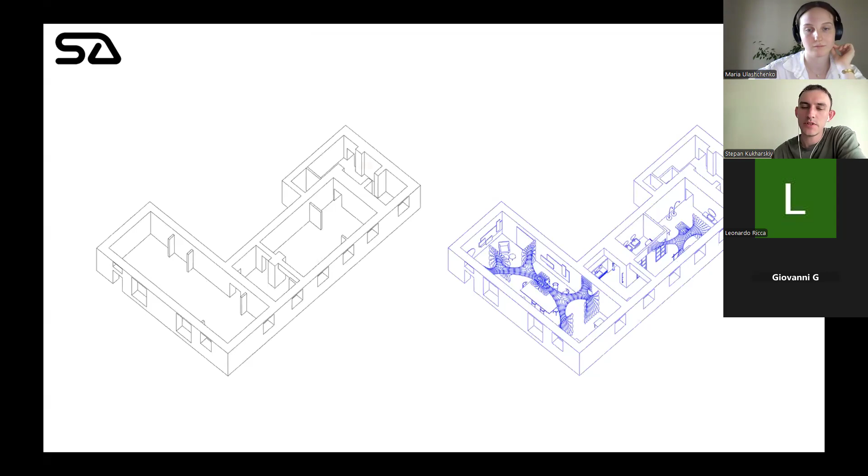Like this one, it's an interior for an interior design showroom. We created the whole interior with this parametric structure. This is the axis of the space, and you can see two parametric structures like this.

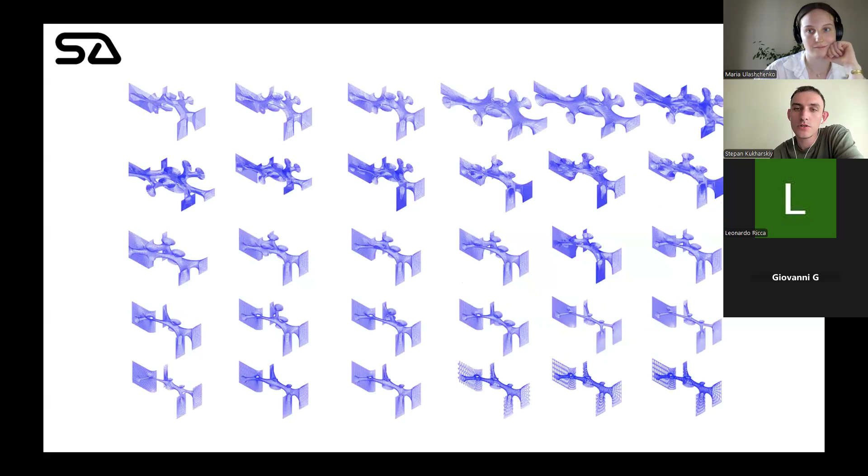We use Grasshopper and Rhino a lot, experimented with form finding, then tried to make everything simpler for it to be really buildable within the time limits and budget constraints we had working on this project.

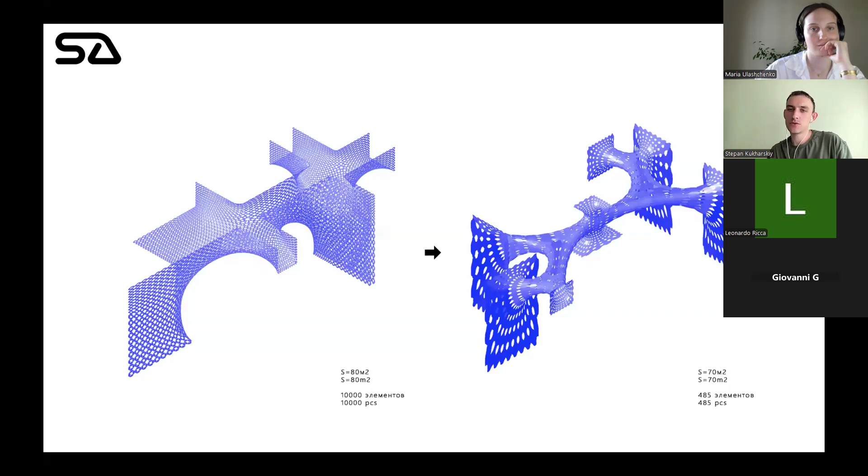So here you see how we went from a form approved by the client, but it initially had like 10,000 elements, so it was really hard to assemble. We reworked it into 485 elements, which is way less and way simpler to create and build.

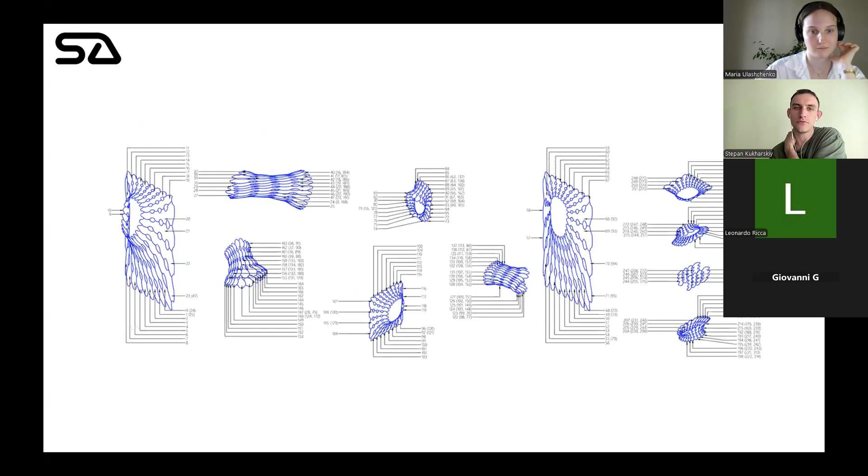It's all laser cut from flat aluminum sheets, and when you assemble those parts, they combine into 3D modules, and those modules combine together to assemble geometries like this.

We worked with two companies. One company produced 3D prints of different objects from recycled plastic, and another company provided us with hydroponics and plants.

So with students, we developed algorithms and geometries to be 3D printed and assembled together, thinking about how we can bring vertical farming into our cities, both in interior and exterior spaces, to grow herbs and food, something edible within our cities, not outside, but as close to the citizens and final users as possible.

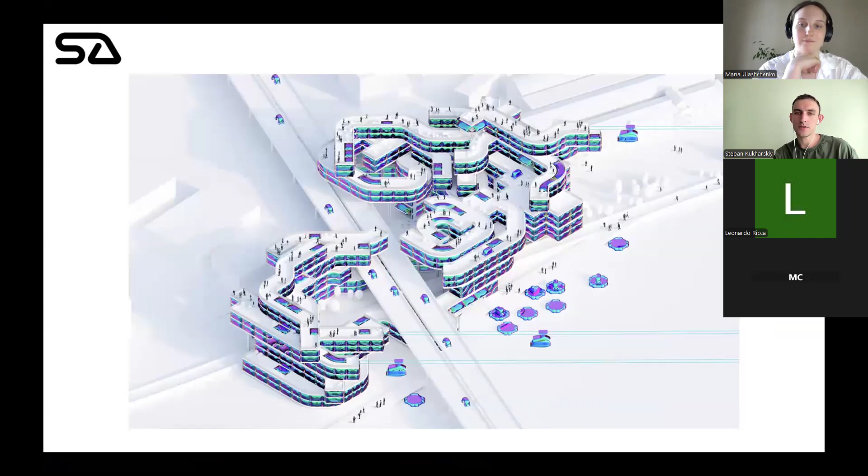So this project is a project for a competition we won, I would say maybe a year and a half ago, specifically for using AI.

It was before MidJourney and before ChatGPT, and we used a tool called Dream, and we started generating some phrases describing this future city.

How do we want to see it? What kind of features will it have? Then those features we just put into a prompt and generated some images, and that's how we got these mood boards.

And from these mood boards, this project was made for a company from China. They create autonomous vehicles, and they needed some transformable spaces for their autonomous vehicles, inside those vehicles.

So what they do is a four-wheel structure for the vehicle, and on top of that they can place different functions. It may be a hotel room, for example, or an office or shop, anything.

So basically they were experimenting with a constantly transforming and moving city without static buildings, where most of the spaces are created by their vehicles having different functions and being in constant movement.

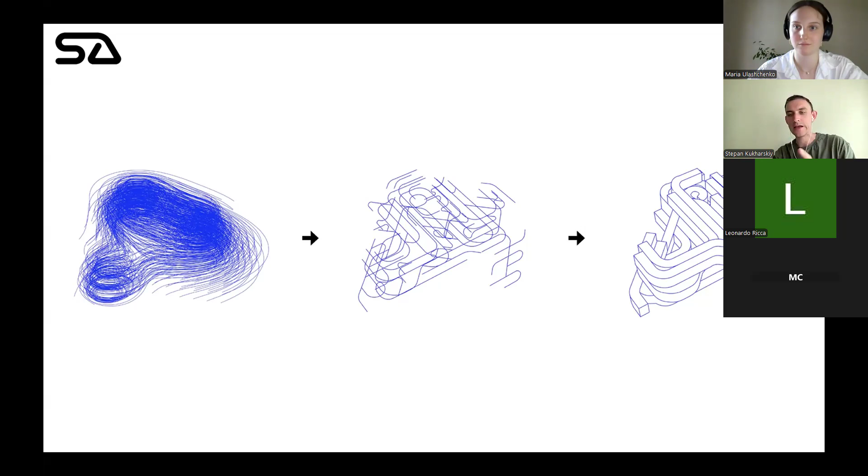So we kind of grasped the infinite movement of the vehicles, tried to make it more modular, for it to be buildable and constructible, and experimented with different compositions.

So you can grow this structure or decrease this structure by adding modules or removing modules.

I experimented with economics for this project. We took a market in Lagos as a test site, and we decided that we will keep the market.

Certainly, but we will add some more functions to it, like cafes, magazines, startups for recycling the products from the market and producing something new, like packaging, for example, for those products from the market and stuff like that.

And so we ended up with images like this. Modules, wooden structures with inflatable walls from ETFE that could transform, letting the vehicles in and out.

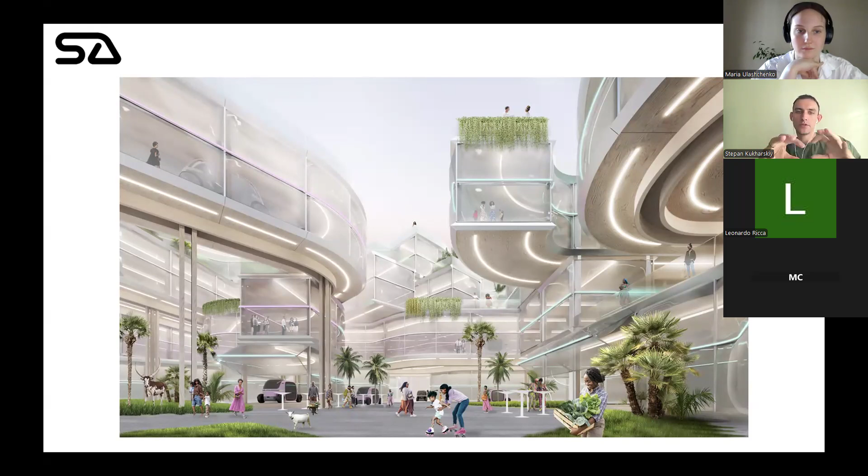It's a city neighborhood that is in constant movement, where there are no rigid separations for transport and for people. They all mix together, combined in a continuous space, something like that.

It's working. So we experimented a lot with the concept, working with AI together on the concept, trying to find the logic and the story that we want to present with the architecture of the exhibition space, and later on, of course, with images and 3Ds and so on.

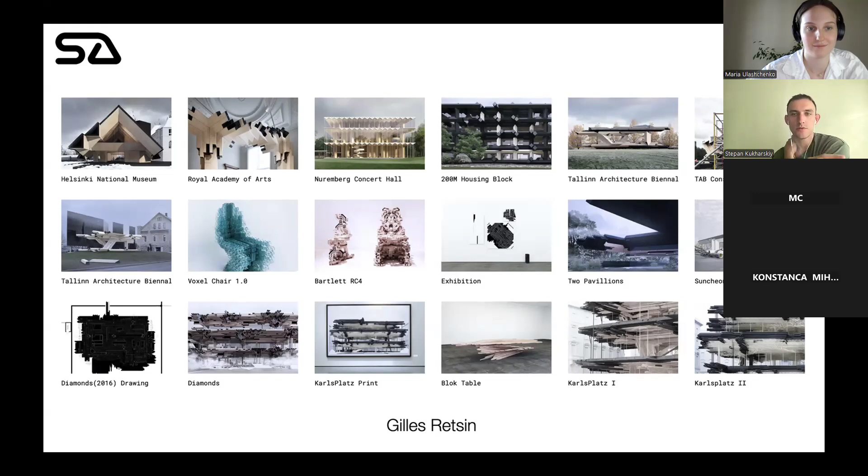This guy, his name is Gilles Retsin. He is experimenting with a discrete approach in architecture - combining different pieces, modular architecture, stuff like that. He founded his own company called AUAR, which is mobile factories building homes. What they do is ship a robotic arm in a container that assembles different parts for buildings on site. They create buildings like this, and work together with different developers across Europe and the United States.

The Very Many by Marc Fornes produce sculptural objects. They do not create their own software, but of course they use their own in-house algorithms developed with Grasshopper, Python, and I guess different other technologies as well.

When you work with software as an architect, you have something in your head, but to implement this you've got to master the software. And if you do not know your software good enough, you cannot create the ideas that are in your head - so you're getting blocked by your software skills.

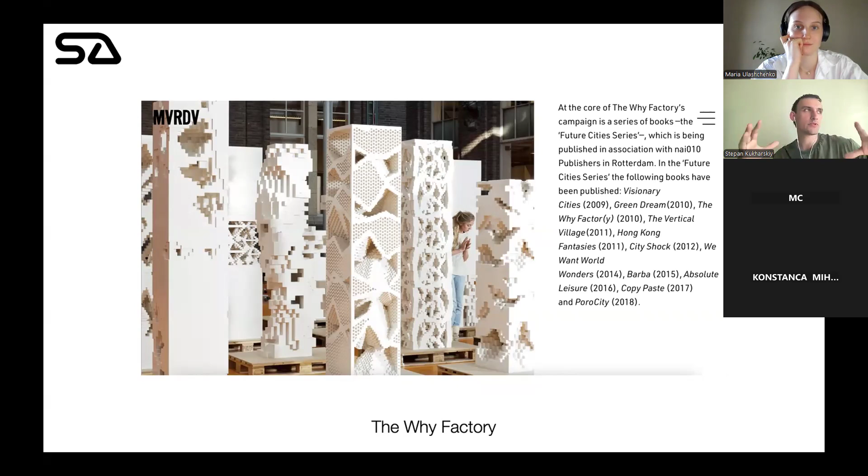The question here is, who is controlling your project then? Is it you, or is it your software skills? A lot of different architectural companies and studios across the globe invest in experimenting with technologies. For example, MVRDV has the Why Factory, a separate group of architects experimenting with technologies, creating experimental projects for exhibitions, stuff like that.

When we talk about software, there are different concepts nowadays. One of them is Software 2.0, introduced by Andrej Karpathy, and recently he introduced a concept called Software 3.0. Andrej Karpathy worked at companies like Tesla, on Autopilot for example, and then at OpenAI on models like GPT-4. Now he's working on his own company, mixing AI and education.

The idea behind different types of software is that Software 1.0 is executing a program line by line, with a predetermined outcome - you write your program once, it outputs some results, and it works always the same way. Software 2.0 is based on neural networks - instead of writing a program that outputs something, you train a neural network on a dataset to output something, and that's Software 2.0.

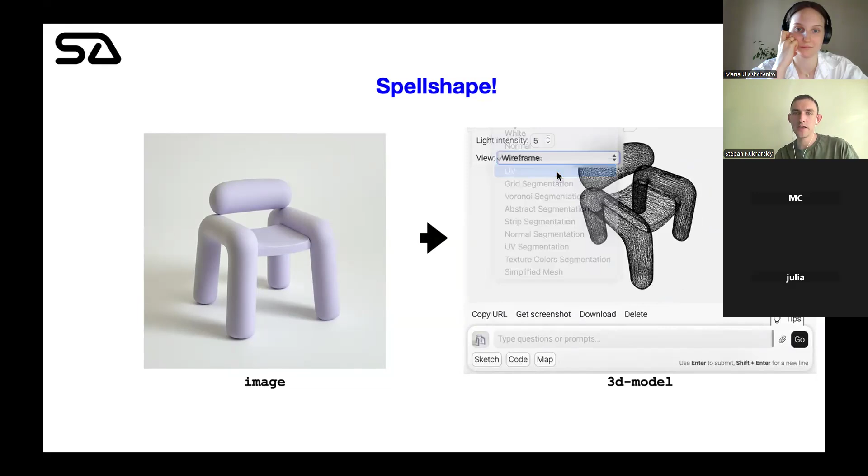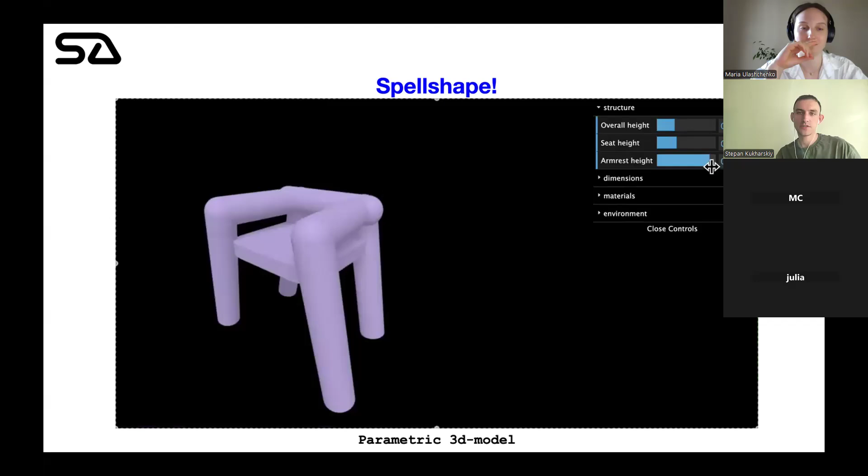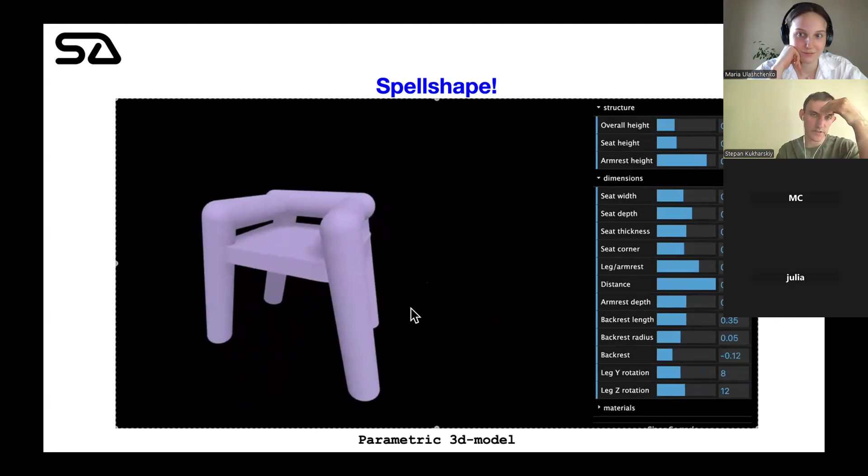So you can start with some simple description like a chair, for example, and we will produce you a chair model that you can set up the way you want it to be. The geometry, the quality of geometry here, is controlled. So it's basically working like text-to-code, then visualized with a 3D thing. It's a different approach compared to image-to-3D that is being developed right now. We call this tool Spellshape.

It's not available yet. We experiment with different things like parking structures. For example, you can get a parametric model for a parking structure with just a single prompt, and you can then fine-tune the number of floors, the parametric facade, for example, if you want to, the columns, everything you need for a simple project like a parking structure.

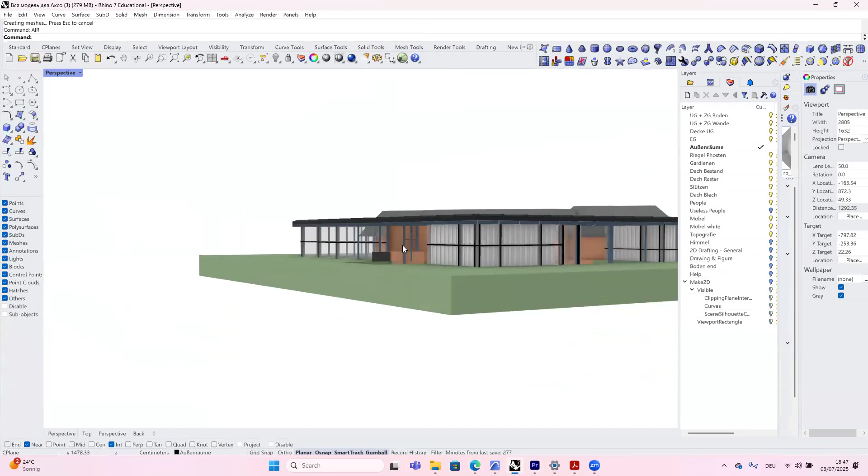Let me move this over here. So what we have here is a 3D model that I did with my partner one of the last semesters, and it's just a house. Nothing special about it, just a 3D model. And what we're going to do now is showcase SUAPP for you.

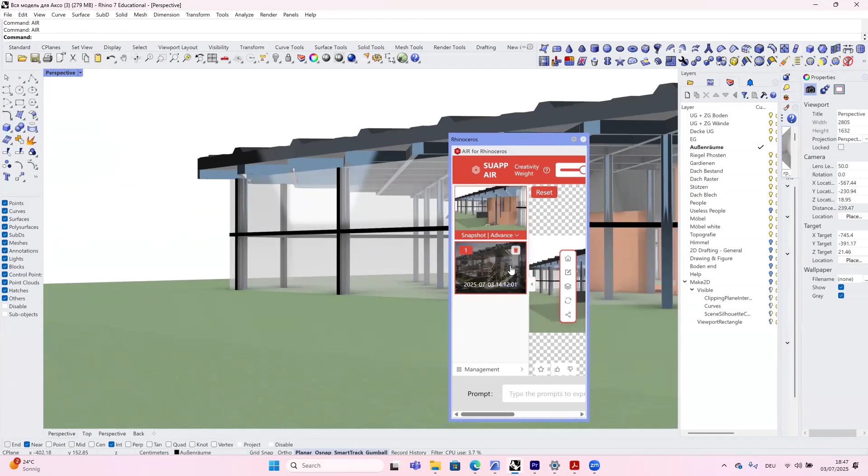So what you would do is go up here, type AIR as a command, click, and boom, this window opens. Sorry, I want to make it bigger for you. Do you guys see this window? If you can't see it, type it in the chat. But what we do now is reset it.

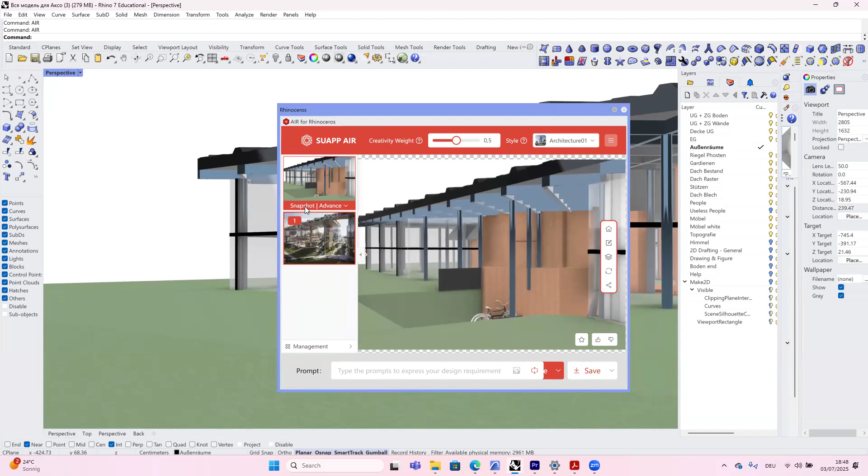So right now it has the snapshot of my 3D model. This is what we were looking at before. I'm going to do the snapshot again. New snapshot, do you see here? Now we have the place here to do the prompt.

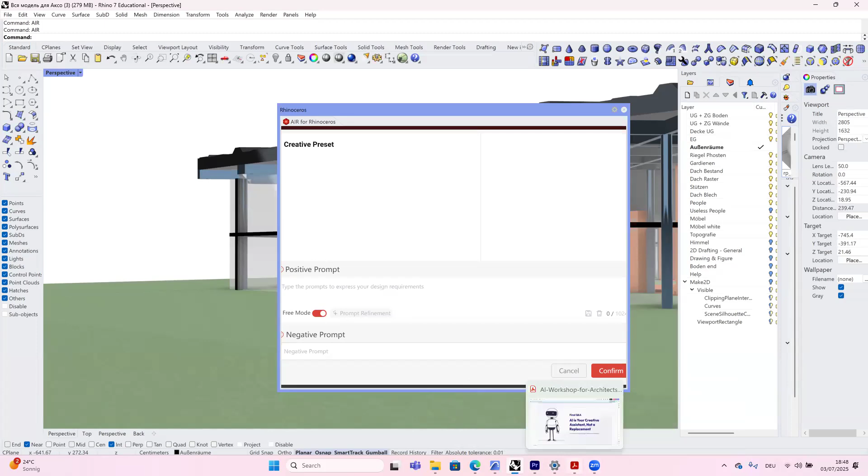So you can type in a positive prompt or a negative prompt. I already prepared some positive prompts, so that's what I'm going to do. But if you want to learn more about prompting and how to prompt effectively, you can watch the recording of the last workshop, which is in the Telegram channel. Let me do organic pavilion, timber facades. Let me make this big because I want to save it.

Here we go, I'm going to just take one of my prompts. We go back to SUAPP. Oh, I don't know what happened. Let me do it again. Sometimes when I switch around too much, it stops working.

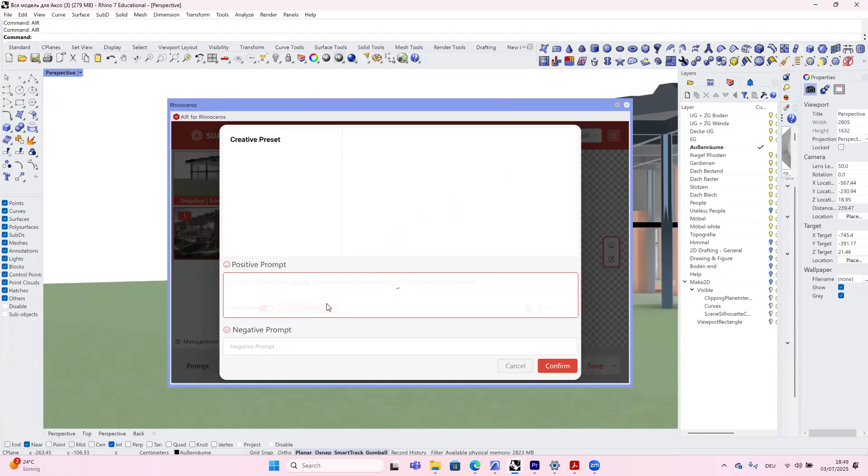Okay, perfect, so I'm going to insert the prompt: organic pavilion, timber facade, parametric form, dramatic soft light, hyperrealistic render. So this is what I did. You can also activate prompt refinement, which is a tool provided by SUAPP itself that makes your prompt better. Look what it did now, it basically improved my prompt for me, added more details, hyperrealistic, every detail. So whatever you need, it refined it.

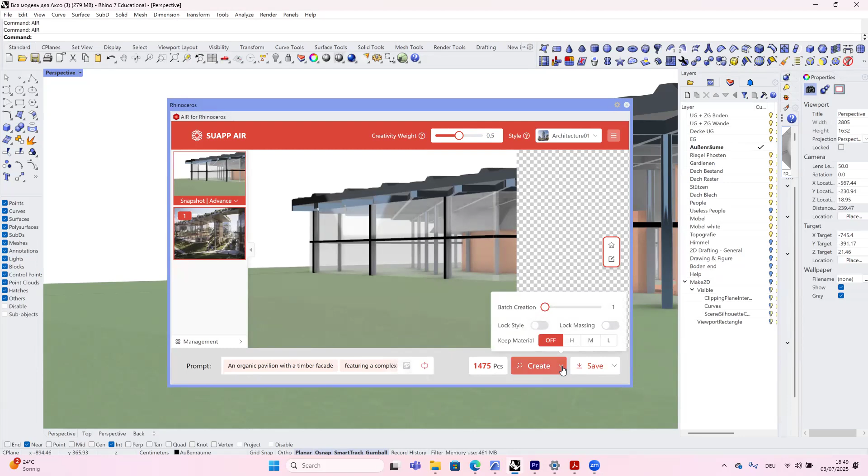Confirm. So now here, this is creative editing, I'm going to talk about that later. But what we're going to do now is click create, and it's going to create a rendering in seconds. This is insane, guys. When I first tried this, I was shocked to my core because I've never seen anything rendered so fast. It takes like 20 seconds, maybe even faster.

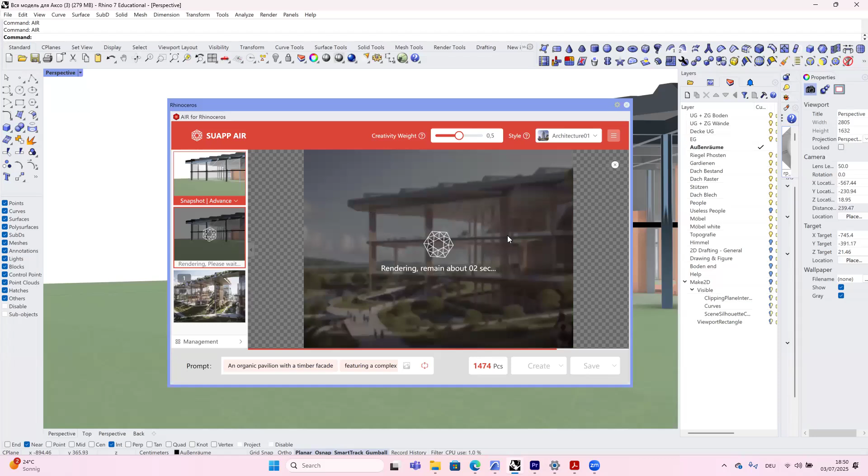But it basically creates a whole render based on your description. Come on, 3D model, render. You guys, like seconds from this to this, and it looks good, even when you zoom in. Obviously you go back in with Photoshop and delete whatever you need, but this looks incredible.

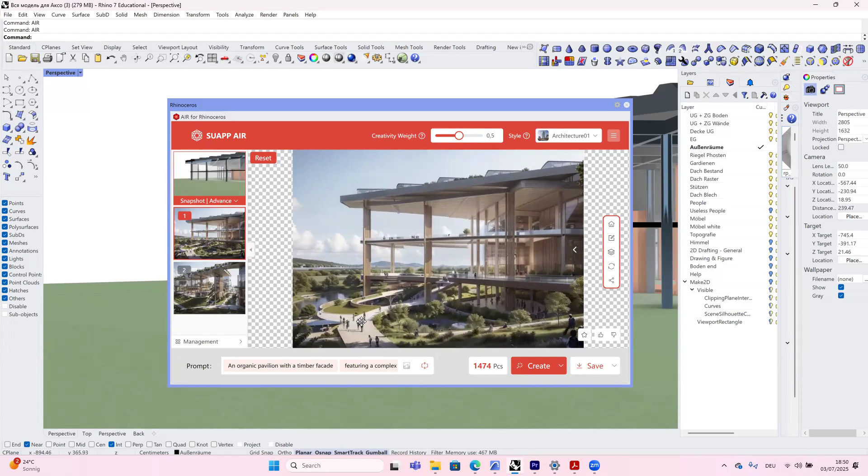Okay, so for example, if you're like, oh, but I don't like what's happening at the bottom here, we go to editing mode. That's what I meant, I was like creative editing, what am I talking about? But what we do is brush selection, we go like this, so we highlight everything we don't like, basically. I don't like this whole part, I want this all to be different. So I go over here.

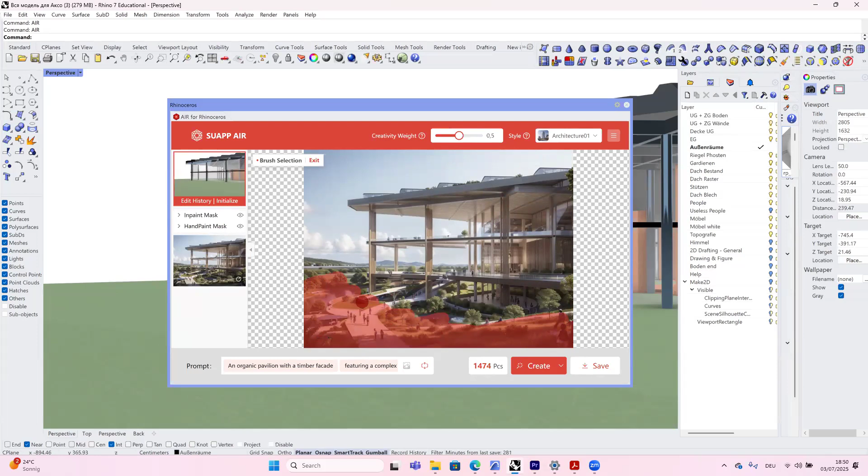And I want... and now it's going to create something different from what we had before, basically. Oh no, where did it go? Hold on, I lost it. Oh no, it's here.

How can I set the scale of the building to match with the rendering? It seems like the AI turned a one-story building into a huge building. So this building is actually, in your case it may be different, but in my case this building is actually pretty big, so it is correct. But if you're having trouble with the AI scaling, you can just zoom in and pick a more human perspective.

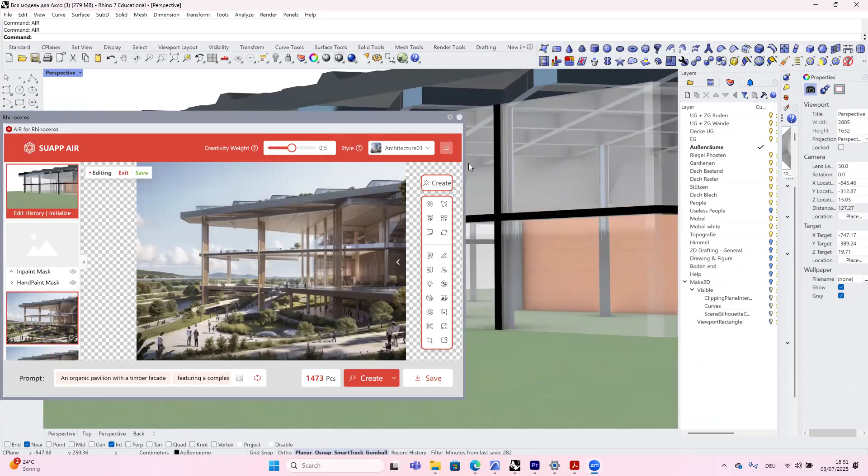When you pick a human perspective, the AI is able to read the scale better. I also know that you're able to set the scale somewhere here. Let me see, lock massing.

If you try lock massing, you can mask different parts of the section of the model, and it allows for a better result. So where's my new thing? Oh yeah, here. Did I just lose it? Oh yeah, look, so this is what I highlighted. I wanted this to change, and now it created this. So amazing, right? Let's try a different prompt.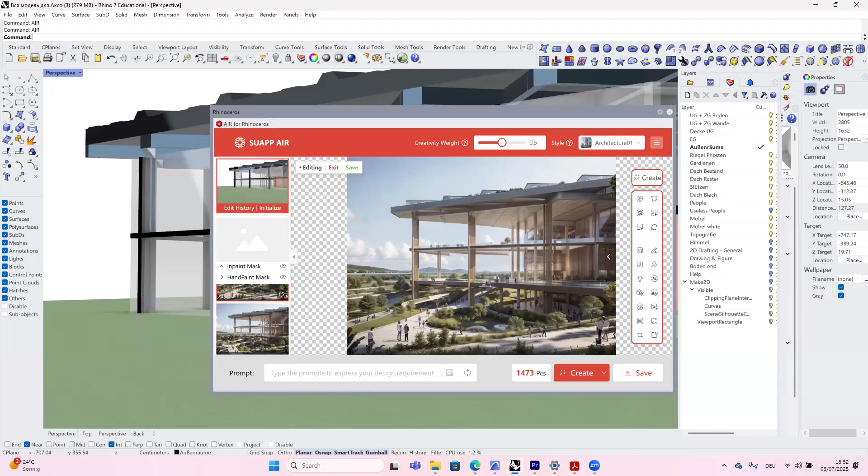I have more prompts. Let's say brutalism, everyone likes brutalism, right? So let me go back in. We're going back into SUAPP, we're typing in our prompt. Oh no, it didn't take it. Sorry guys, I'm going back in. We're going back into the Rhino, going back in here, we're going to do some prompt refinement.

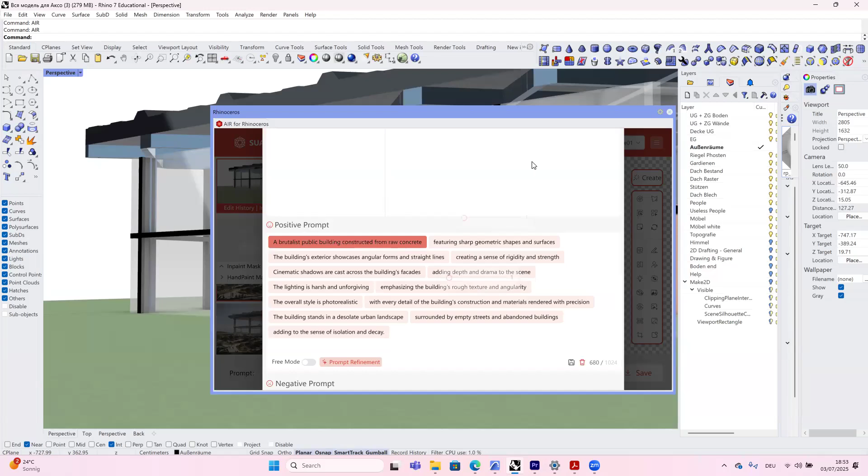The AI does it for yourself, so it refines the prompt for itself to understand the prompt better, which is super cool. Also, if you click on different sections of the prompt, you can highlight how important it is for your render. So if you go here, like 'Brutalist building raw concrete,' you can give it a 4, and then it will treat this part of the prompt as the most essential, basically.

Okay, so here we go. Okay, hold on, let me confirm.

Does SUAPP work with Archicad or just Rhino and SketchUp? I believe it may also work with Archicad. I've only tried it with Rhino or SketchUp, but if you're having issues using it with Archicad, you can convert your Archicad model to a 3DM, which is the Rhino file, and use it in Rhino as well.

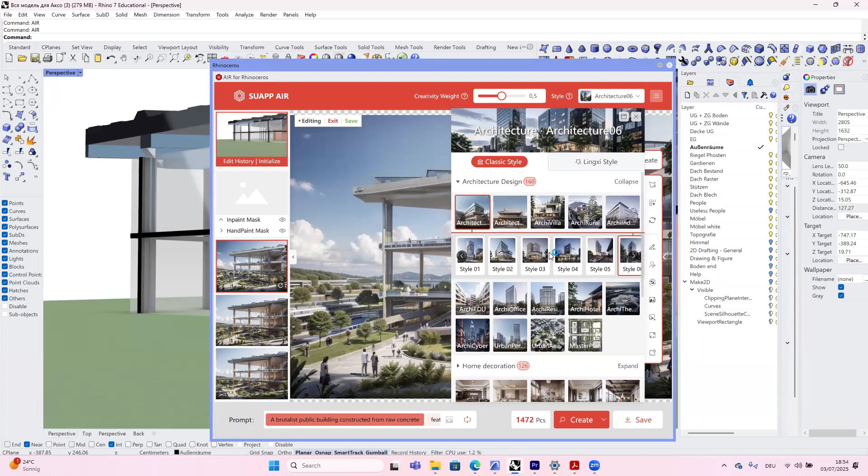So look what we have here now. It's interpreted our prompt, so we went from the wood building to a concrete building. You can also go up here and pick different styles that SUAPP has chosen for yourself. So maybe you like this style or this type of building. Let's try something new, and then you just click create again, and you can experiment.

Obviously this is not like perfect rendering up front. You can't control it perfectly, but it is incredible for testing out quick renders to see how your image goes.

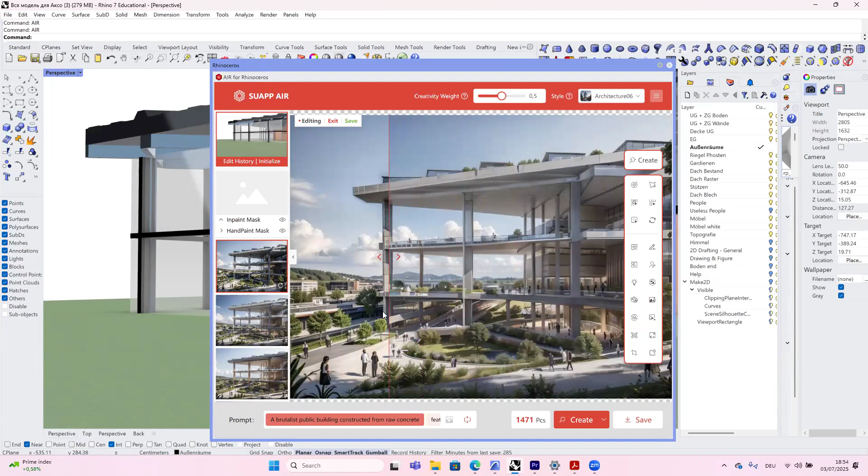Okay, see, now the rendering has a little bit of a different style, and it has maybe more of what we were going for. The raw concrete building, it's very cool. I just want you to see what changed, so if I go left, right, left, right. Pretty cool, huh? Yeah, I think this is definitely very cool.

I'm going to save this into our workshop file. Save, for us to use later in MidJourney.

Also up here, you can find the creativity weight. The creativity weight basically allows the AI to see how much creativity it has. Let's just set it to 0 and see what happens. I'm just playing around now to show you guys how it works. But very cool.

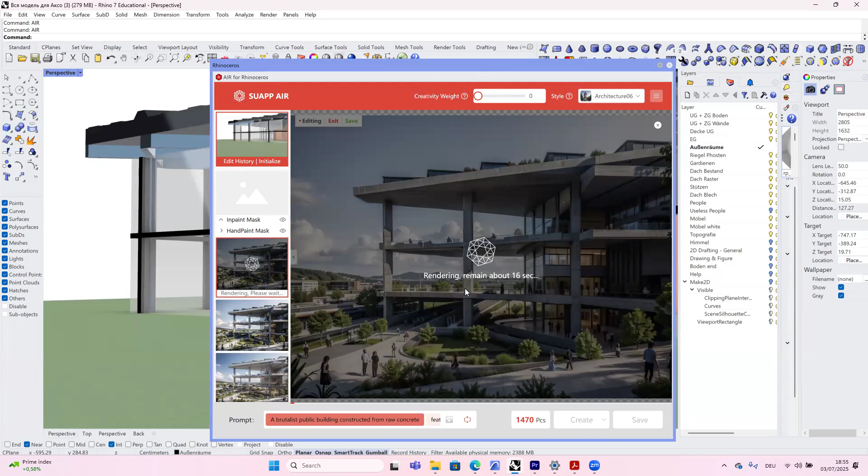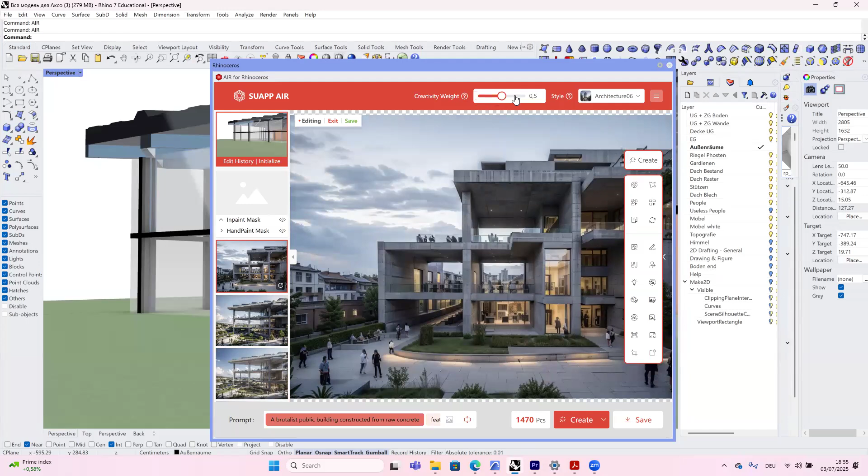Okay, now it is changing our shape, so we have to maintain the creativity weight. Let's see what happens if we get the creativity weight to 1. What will happen with our model? So it's still using my basic image, just a screenshot of my 3D model, and it does all this. I think that's incredible.

Now some changes were made, but because our creativity weight is set to 1, it's not that big. So this is how you use SUAPP AI. SUAPP Air is the command, SUAPP AI is the full name.

Before we move on to MidJourney, I want to go through the editing. So obviously you can do the brush selection where you can remove stuff, the lasso selection, precise selection - these are just selection tools to fix things. You can also do inpainting, so you can implant specific objects from Google and put them into your render. You can sketch and add stuff, collage, background remover, style reference, a lot of options, guys.

Let's say I want to sketch. Let's say we're going to add a roof here. Okay, this is a really bad drawing.

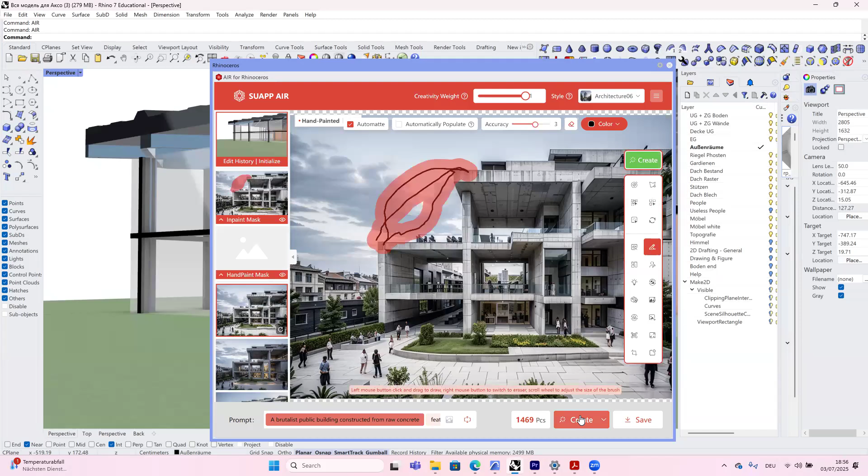Obviously this is a really bad drawing, but you're gonna see what it does. I think the program takes a little bit longer because the AI has to think about what my messy drawing means, but I still think it's very useful.

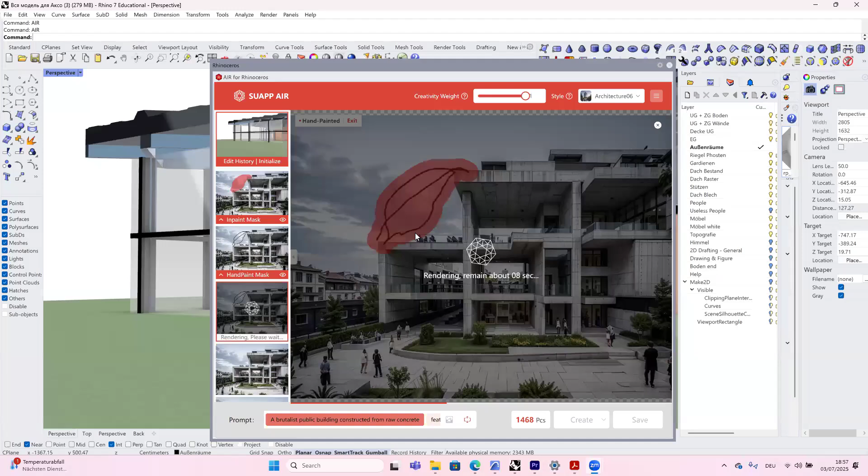I use SUAPP AI for just testing out how my 3D model looks and how it comes off on a render, because sometimes you don't have enough time to render fully just to try it out. I use it as a shortcut to quickly see what happens to my render.

See, okay, it interpreted that as glasses coming from the roof, but that's pretty cool. Imagine if you actually took your time and drew a full roof here, it would just integrate that. So that's super cool, guys.

So this is SUAPP. I would like to go back here. Sorry guys, no more editing mode. Okay, here we go.

Full screen mode. So this is where we were now. So we saw how to use SUAPP AI, this is what I showed you just now, we had the demo. So let's talk MidJourney.

MidJourney is another AI tool that allows you to create AI visual storytelling. It's best to generate images for architects, but also a lot of game designers and creative professionals use it. You can also do animations now with MidJourney version 7, which is super cool. Obviously you also need a subscription for it. I just got the student subscription, which is $11 per month, but I think it's very worth it.

So what is it best for? In my opinion, it's best for mood boards and atmospheres. You can create really cool reference images, material and facade studies, competition visuals, and early project presentations, which I think is super cool.

So why do architects use MidJourney? They use it to explore style and materials because you can create reference images. It's also ideal for competitions or client pitches because you can create compelling visuals very quickly for presentations. And you have creative freedom because it's AI powered, so you can quickly try out different tools very fast, back to back, which is very cool.

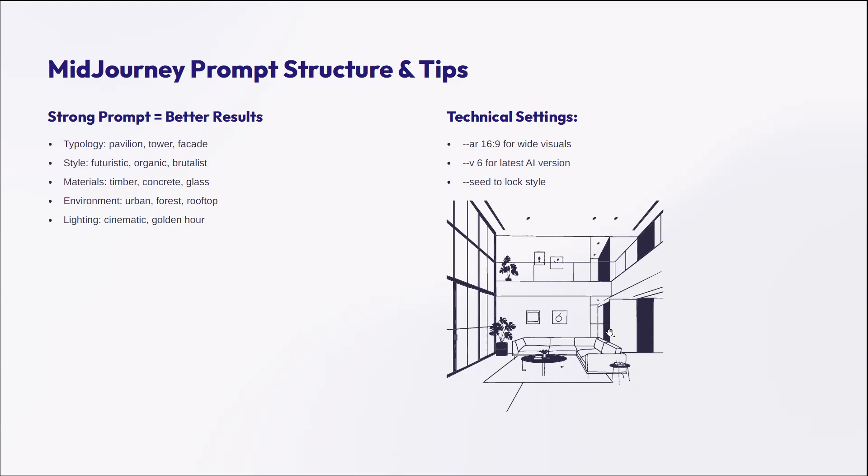So I think those are the most important tips, and also some advanced tips I added recently: you can test multiple prompt variations, and use opposite keywords sometimes to get new results. A friend of mine told me to try this, and it actually works pretty well.

I will show you now. You can refine prompts with each iteration, and you can upscale the best images. But also, warnings: the AI can sometimes generate unrealistic forms, and you definitely need to validate your concepts before modeling. It's just for inspiration. Obviously, you can't really use it for construction documents or anything of that sort yet.

So now I'm going to do the demo for you. Let's go. Here we go.

Okay, so here we are in MidJourney. I just typed in MidJourney and logged in with my account. Basically, what was also on my story is I just took one of my prompts, which is organic pavilion, timber, isometric form, sunset setting. As you can see, I have the typology, the form, the setting, the light, and the render.

And this is what we got. So this is already V7, it just created some images. Obviously there was no reference image input by me, it was just the software itself creating these images. But I think it's very cool what it can create with just a couple of words.

You have some creation actions over here. Sorry, maybe I should have mentioned this before, but to create something in MidJourney, you go on the Create tab and type in your prompt. Once you get your images, you have some actions here, like create strong or subtle. If you pick an image and do strong, it will create multiple images of that image. You can also rerun the same image, or animate it with high motion or low motion. I'm going to show you that now, but I think this is incredibly interesting for trying out.

And then what I did is I used the same prompt and said, okay, animate this for me. And this is what it made. So just from nothing, we created an animation of a pavilion. Amazing, right? This is what happened, this is what was on my story.

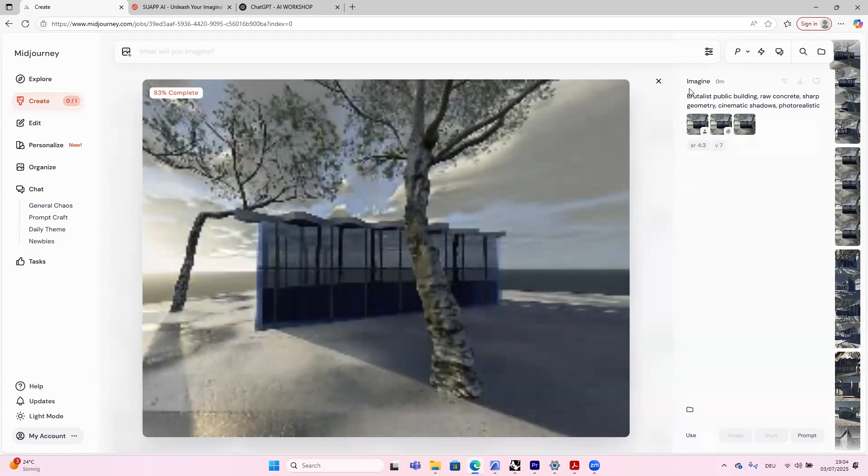Okay, look, it already looks like my model. The image I put in, if you were in the last workshop, you know this is exactly like my model. It has the same vibe, this is basically my model image. Let's see, it's still not done, so I'm going to wait until I am excited.

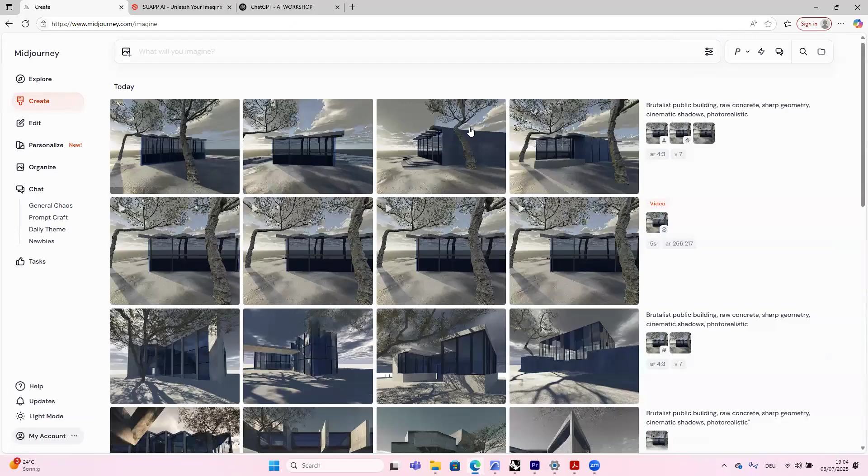But here are some animations. What I would use MidJourney for, if you're an architect, is you can input your 3D model screenshot and it creates a full cool animation. We can also try a new one if you want. But look, now it created different views of my model. I think that's amazing. Let's try it again.

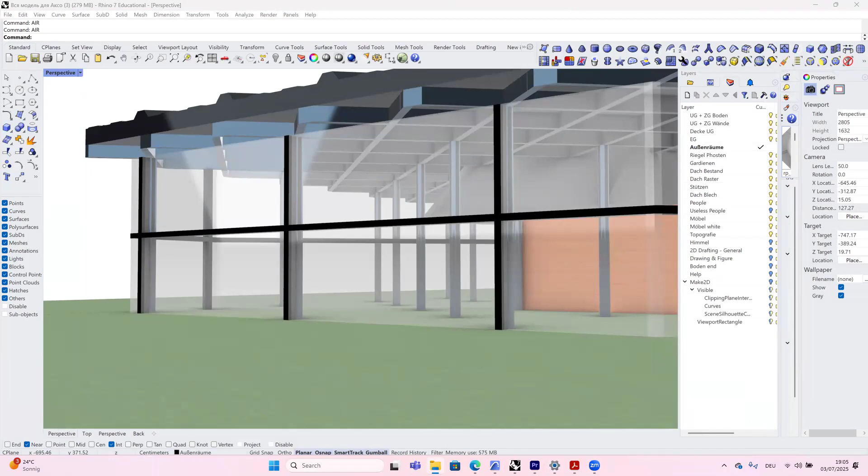So let's take my image, I'm just going to create a screenshot. So I just made a screenshot. Where's my screenshot? Did I just lose my screenshot? I hope not. But actually it doesn't matter. Okay, I don't know where my screenshot went, but we can just go here.

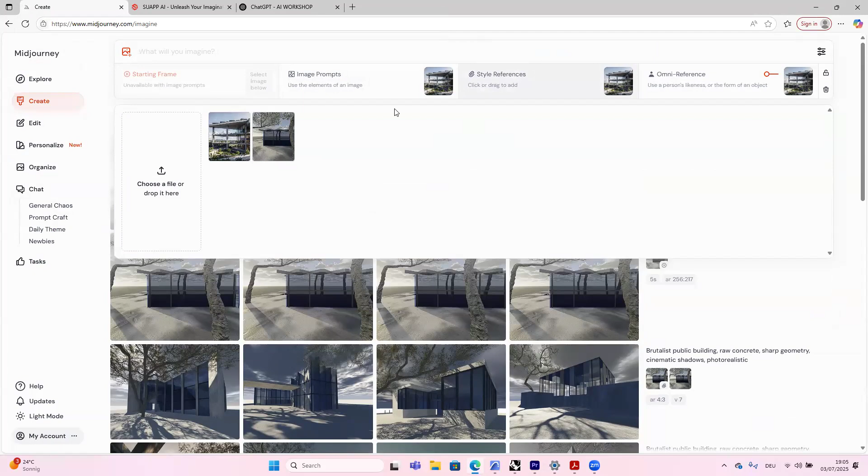Let's add another image, let's add my SUAPP image. Open. So we're just going to use my SUAPP image. We're going to use it as an omni reference, okay, so we put it everywhere. And I'm going to use my same prompt that I used last time.

So this prompt, and let's see what MidJourney creates. So I'm using V7 and not changing anything for now, we're just testing it out.

Let's see. But I actually didn't know you could use images before, because MidJourney used to be on Discord in the early days, and I don't remember you being able to input images like that. I think that's pretty sick, in my opinion. Let's see what it does. So obviously we gave it a prompt, but also our image, so it's going to use both to create the visualization.

Let's see. 71%. Cool.

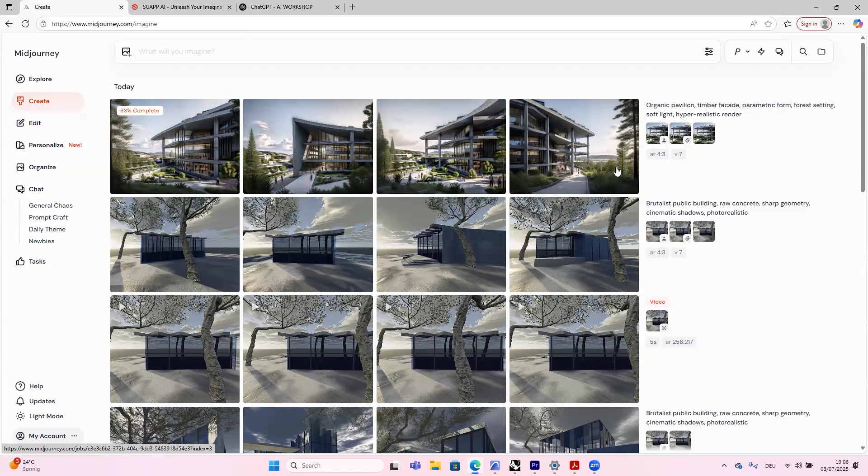So obviously you see the image is not exactly like a 3D model. You can play around with some settings, reduce the creativity of the actual AI, and tweak around to get as close to your original 3D model as you can. But obviously it's not going to be perfect. This is AI, I don't think there's a perfect AI yet, but it's cool for experimenting.

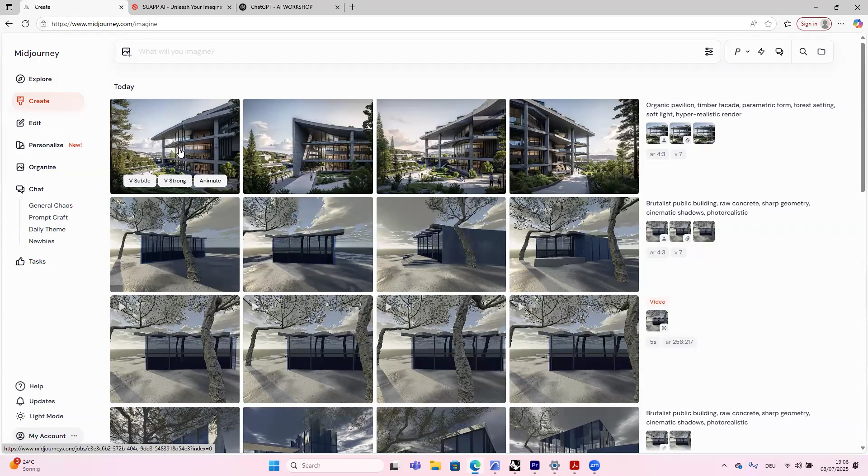So this is what we got now. It just took our image and basically made it more refined. I think it changed the roof shape actually, but let's keep it as is. Let's say, oh, I like this one. Let's say strong, we like this, and let's animate it in high motion.

So now we're going to wait for the video. Down here it's creating the variations, and up here it's creating the video. I'm curious to see what either one will be like.

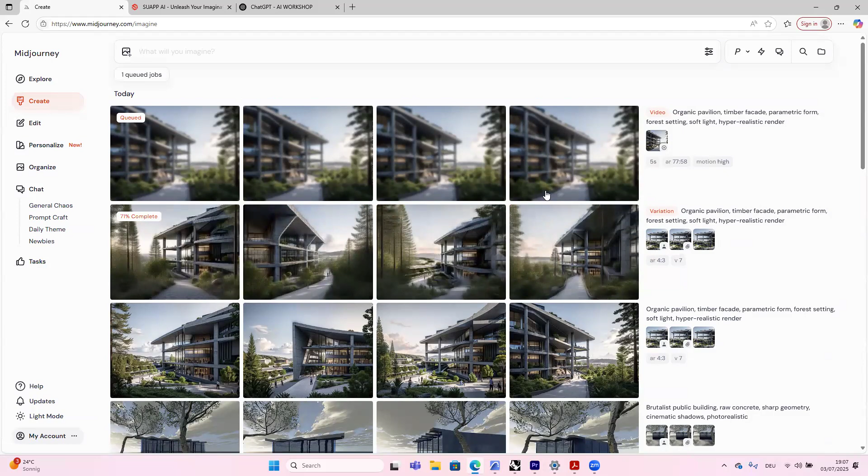So now down here, it's creating some variations of the image I said I liked.

Okay, cool, this looks cool. Obviously it looks a little bit AI over here, you can go back in with Photoshop and fix it. But guys, you have to remember, we basically started with nothing, and now we're here. I think this is amazing for what it is.

And now it's just doing the videos for us, which is my favorite honestly. I really enjoy the videos.

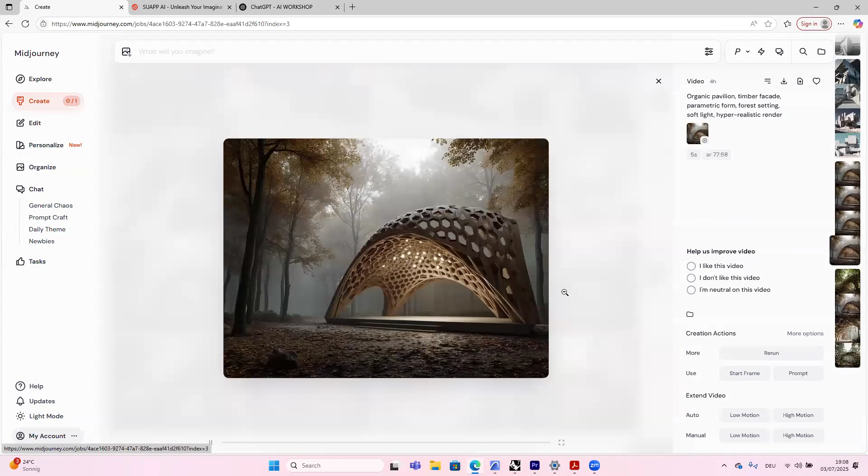Yeah, but this is what I was doing before. The animations are incredible. If you just use your 3D model, like what I did here, and input your thing, it's amazing.

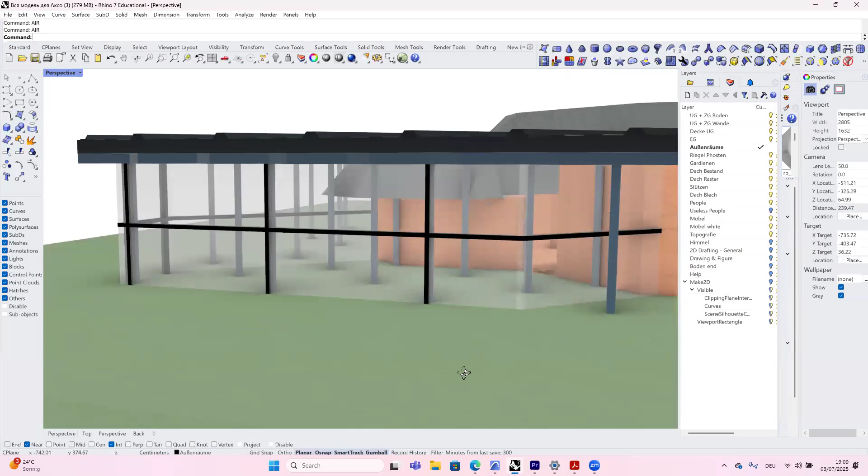92%. May I ask you a question? Yes, of course, go ahead. Thank you for the workshop and for this opportunity, it was amazing. I would like to ask you, when you start with a master plan or a landscape view, and take one perspective view, can you take more than one perspective view in one landscape or master plan area? Are you talking about Midjourney or SUAPP right now? I mean, for example, you just had a 3D model, and instead of any other visualization, you just use it, a tool like this SUAPP, I don't know how to call it. But you took one perspective view, can you take more than one perspective view with the same landscape area which you gave?

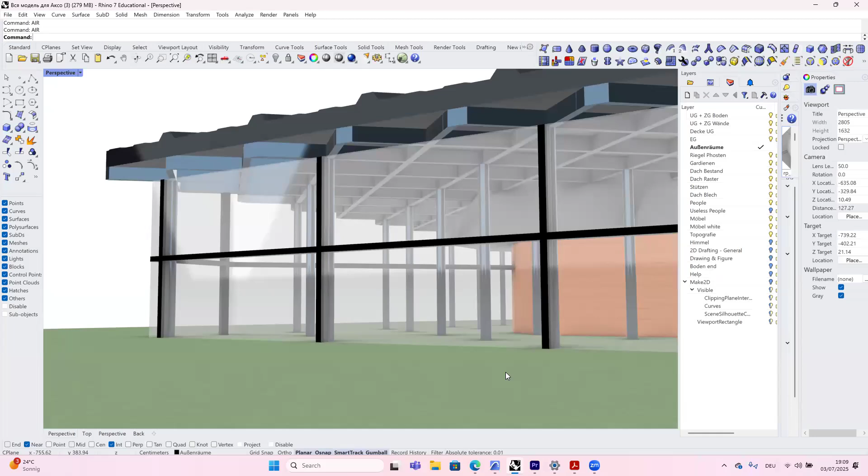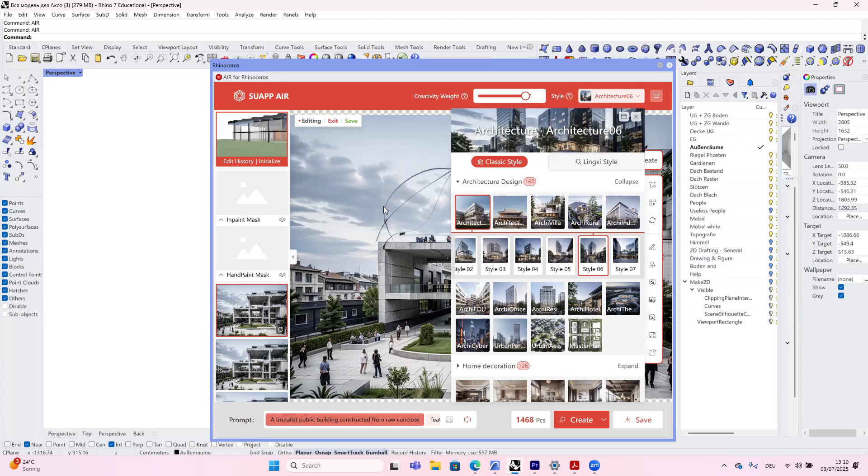Yes, you should be able to. And also possible to take a top view? Yes, you can pick the view you want to use. But in SUAPP, in the same visualization that AI gave us? Yes. So what you would do is type in the command, pick your top view, and over here pick the style to be the same, and you would just generate multiple snapshots and generate multiple images from the snapshots, but in the same style. If you keep the same style and prompt, it should be able to retain the landscape and everything. At least that's what I was told, so you should be able to.

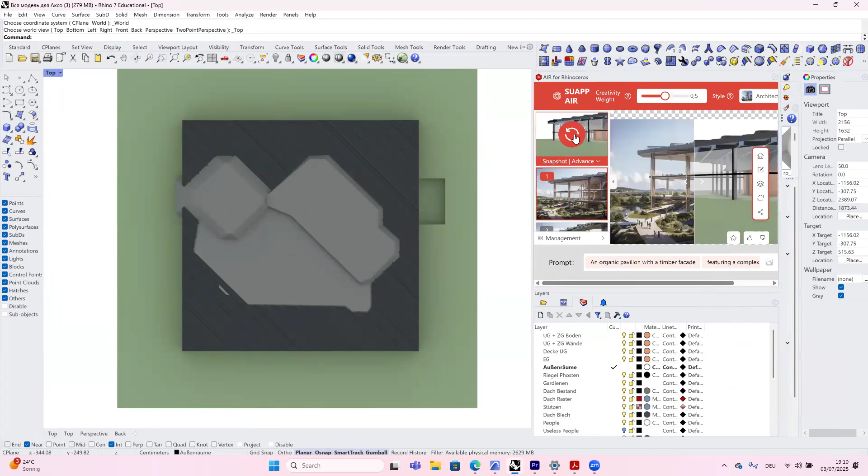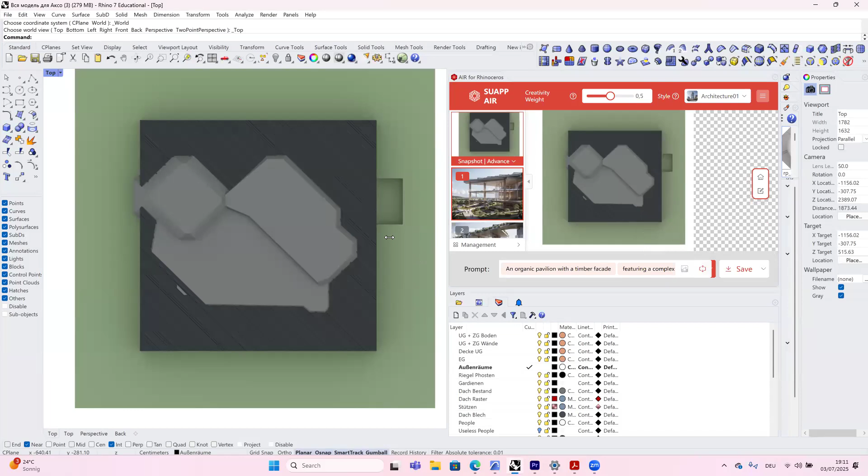I think maybe if you want to, we can try it with this one, just to make sure I'm not talking wrong here. Okay, let's see. We're going to set it to top view. We have our AI here, so we're redoing a snapshot, and now we are going to do it again. Sorry, I don't know why it's so small now. Okay great. Sorry guys. Let's see, it should be able to, at least that's what I was told, but we will see.

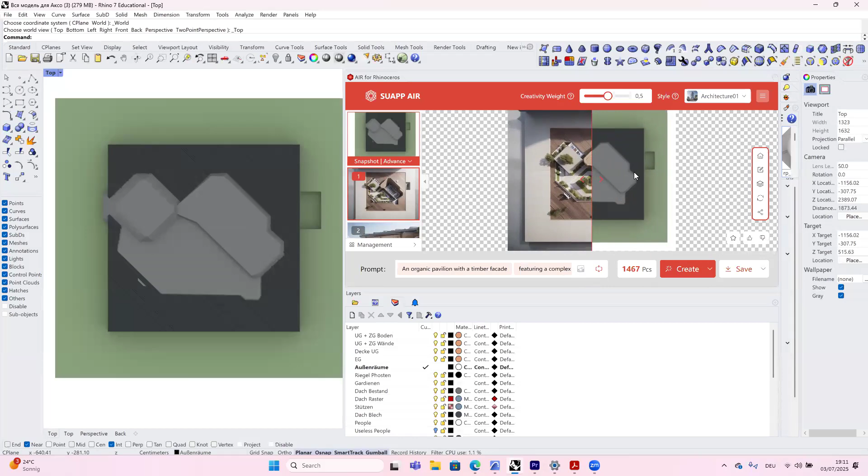Okay, now it interpreted my model. It's obviously working with a different prompt than this one, though I used the same prompt as before. With the top view, you'd have to adjust the scale a bit and play around with this massing situation. If you go down here, you can do lock massing and set a massing scale for the AI. I think if you play around with this, you can create some cool images, but this is what it interpreted now - obviously not what we mean, but it's trying to keep the same style as before. It's just confused about the lock massing. I don't know if I have enough credits to try that, but you should be able to.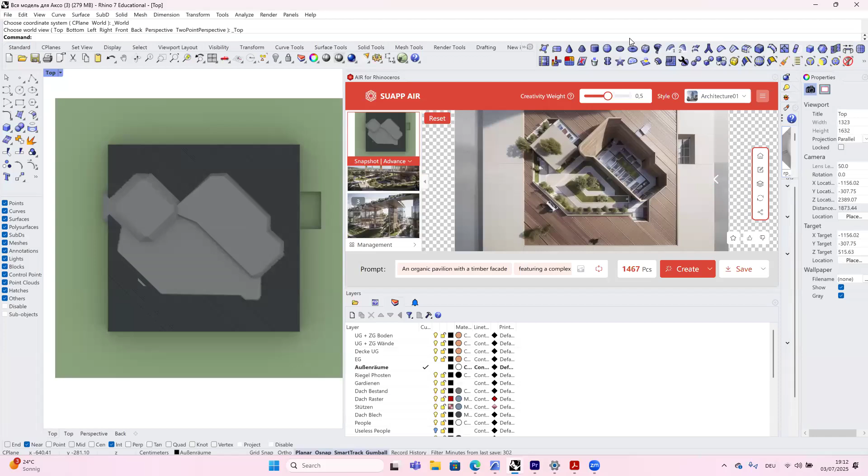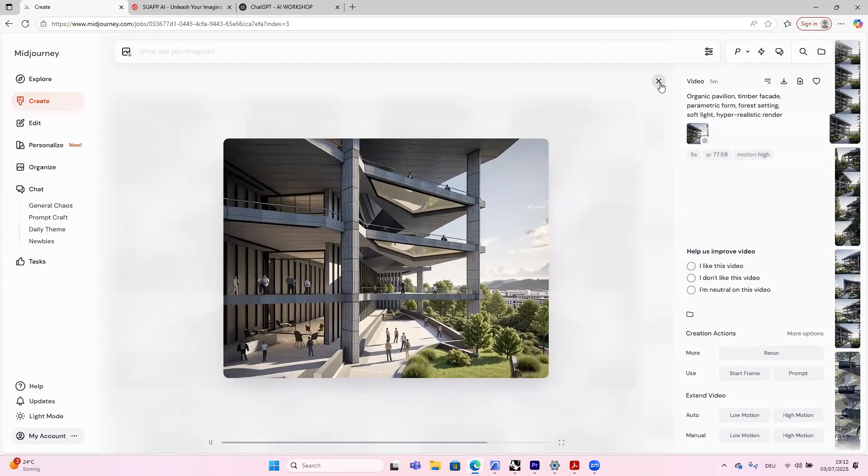I'd like to go back to MidJourney because I think our video is generated now. Look guys, we just created this out of nothing. If you follow architecture pages, you know they always do this rendering shot, which is hard to do manually, but online it's pretty easy. Before you do your animation, you should Photoshop a little bit, then go back in and create the animation, which is very cool. I think that's most of what I wanted to say.

Let me go back and see. Now we have a little bit of time left for our Q&A. Remember, AI is just a creative assistant, not a replacement. Do you have any questions, any project challenges, or any ideas for future workshops?

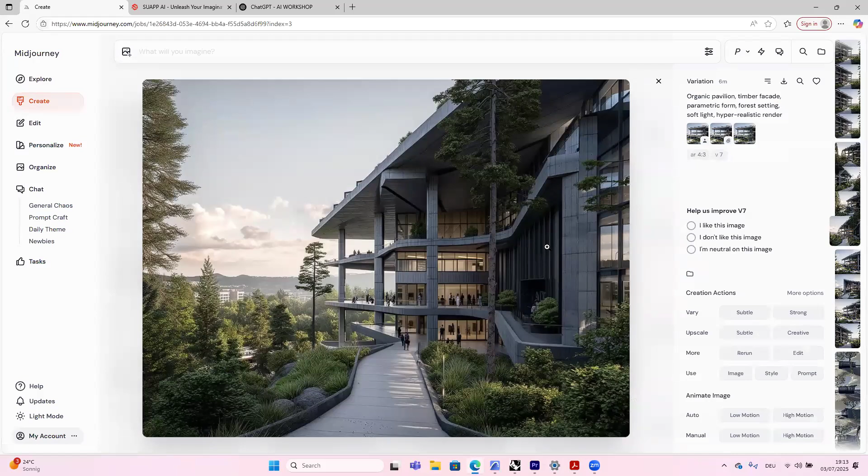Julia is asking, how can you create the video in MidJourney? Let me go back in. So what you do is you create your image - this is the image I created. You go into the bottom here, you have animate image, and you click on low motion or high motion. High motion does the fast zoom, and low motion does the slow zoom. So I click on high motion, then exit, and over here it's going to create the video for me. So I hope that makes sense - you just click the high motion or low motion tab.

Are there any more questions or feedback or ideas for the workshop? Or any guest suggestions, honestly, because I really liked Stepan and his input.

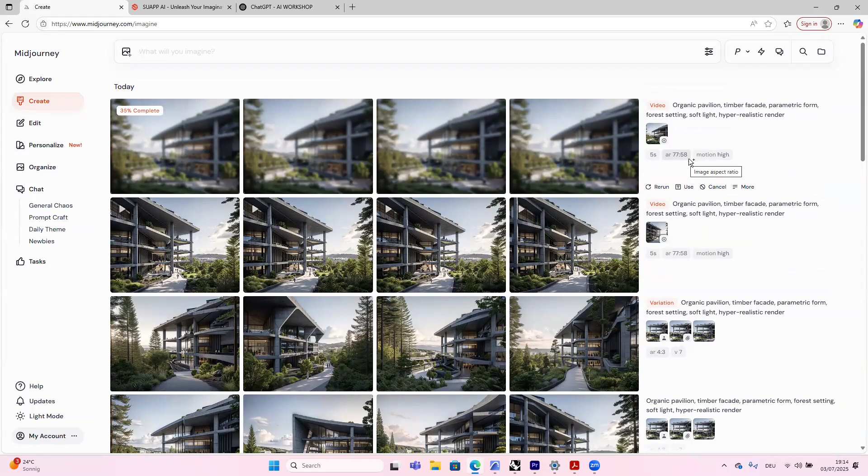So now it's creating our video. Does anyone else have any questions, any feedback, any inputs?